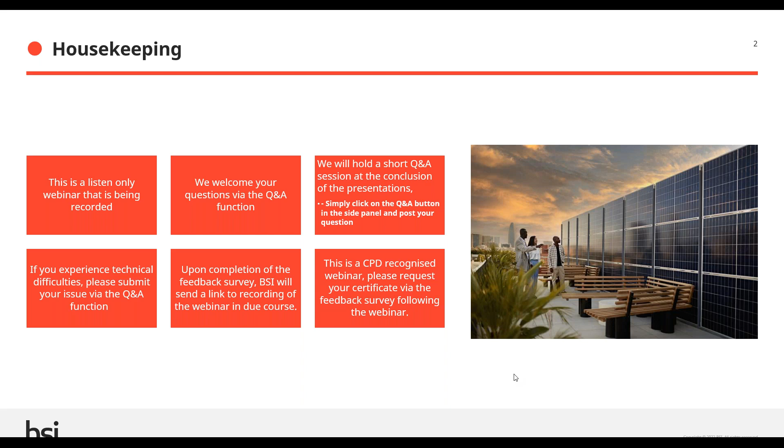Thank you, Claire. Good morning, everyone, and welcome to our 2023 Global Built Environment Conference. For those of us that haven't met before, my name is Ant Burd, and I'm Head of the Built Environment Sector here in BSI. It's my privilege this morning to welcome you all and to say a few words before we move into our conference sessions over the next 2 days.

So, where has 2023 gone, and what have we witnessed in the built environment sector? Well, here in the UK, we have seen a year marked by a significant slowdown in the economy. Construction analysts Glenigan, in their last quarterly assessment, suggested that UK construction continues to be battered by economic headwinds and sudden ad hoc policy change. Slight dig there, I suggest.

That said, more latterly, they have acknowledged that sharp falls in construction starts and a challenging set of economic circumstances in 2023, given the peaking of our interest rates, we can expect gradual improvement in market conditions over the next 2 years, and that's truly welcomed.

And yes, while new construction starts are generally down, we have started to see increased activity in both the new commercial sector and, of course, the repair and maintenance of our all-important existing stock. The fact remains we typically only replace our existing stock at the rate of about 1% per annum, meaning it is even more important to suitably maintain and, where possible, improve the performance of our existing buildings, but more of that later.

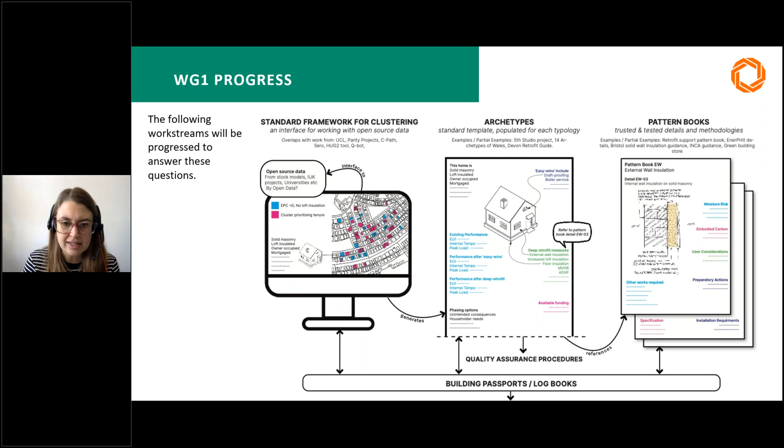And then more detailed design guidance and pattern books, and how they all feed together. These things all link to quality assurance and building passports, and now our thinking is starting to develop.

We're really understanding that the information we hold on a building, whether that's through a logbook, a passport, or another data centre, is key to understanding what measures are applicable, what design guidance you need, the larger structure of the data we hold on all the housing stock, and how you apply quality assurance methods.

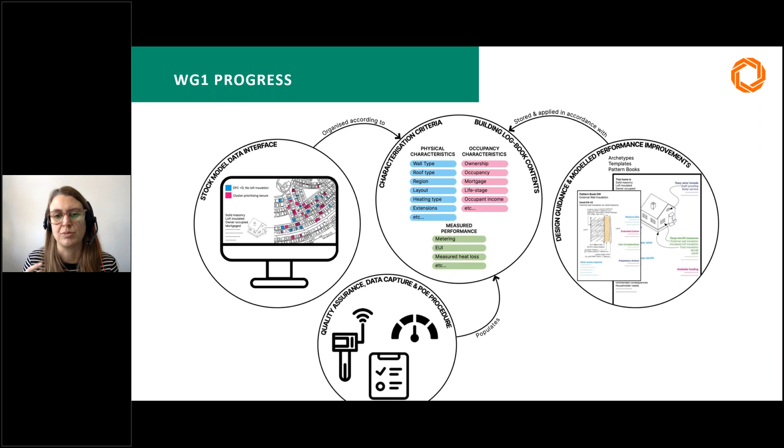So these are 4 different task and finish groups we're currently starting to run, where we're looking to provide frameworks and guidance that allow interoperability and standardization between some of these outputs that people in the industry are making. Working group 2 is on techniques and technologies.

We've held one meeting so far with this group with a variety of speakers. John and Diane talked about the supplier sustainability survey, and the attitudes that merchants, installers and suppliers have on supplying more sustainable products. We also had Stephen talking from Knauf's perspective about growing their supply chain.

That was really interesting because one of the key takeaways for me was that Knauf have really been able to grow their supply chain because of the regulation coming out on new homes, the Future Homes Standard, and they've been able to use that as a reason to grow. But what they're saying is there's nothing necessarily within the retrofit sphere giving them enough evidence to grow their supply chain. That's a key lever we can all start to think about and focus on.

Megan and Lee talked about the supply chain. They're both from Travis Perkins, identifying what the barriers and opportunities in the supply chain were. And then Ben from the SEA introduced their report, which I'd really recommend you all reading, A Technology Agnostic Approach to Heat in Buildings Policy.

This group's identified some potential outputs, so potentially a supply chain picture. How does the supply chain currently work? Where are the bottlenecks and inefficiencies? How can we allow that to work more smoothly to scale up retrofit?

Potentially a forecasting and future-proofing report. If we know what targets our homes need to meet, then what products do we need to get there? Can we start to map that and understand where we need growth? Tech adoption case studies, making it more apparent what technology is out there, and all of that's going to feed into our knowledge sharing.

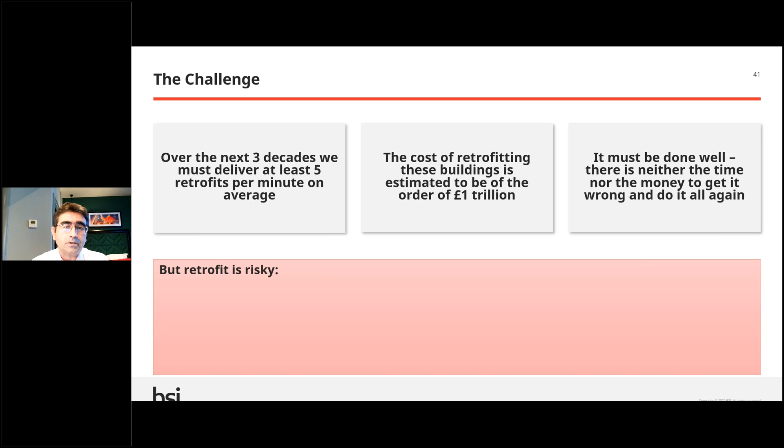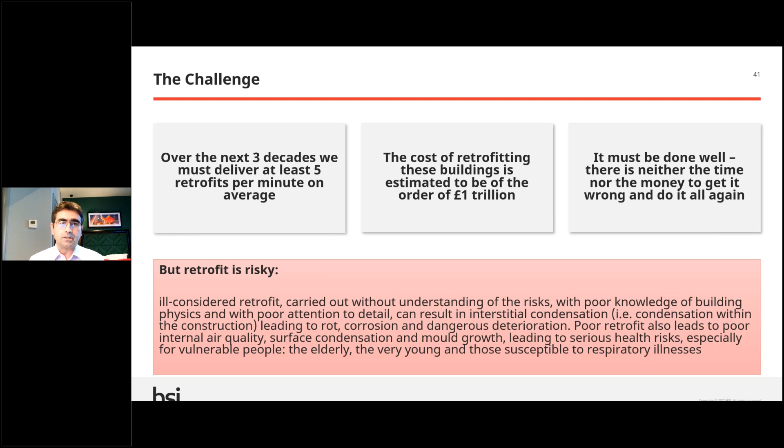The problem is that retrofit is risky, and we've seen this over many years. It's predominantly significant issues in design and installation, or misunderstanding of the buildings, ill consideration of that retrofit, the issues that we have from moisture, etc. And even though industry has made significant advances over many years, we still see constant impacts every day around us from failures within retrofit or misunderstandings within industry at times.

It was back in 2015 when the government launched their first review, the Bonfield Review, which led into the Each Home Counts report, that significant changes started to be made in our industry in this area. That report outlined 27 recommendations, of which there were 3 specific recommendations focused on standards and developing a framework of standards so that we could all work and deliver what was required for the occupants and for all of us at home and at work and anywhere else impacted by buildings.

The Retrofit Standards Task Group was set up to address the standards, and it started out by addressing research and looking at what there was - a similar piece of work that is being undertaken as we've just seen with the National Retrofit Hub, who are now taking on and furthering that information.

The framework itself that was developed following that initial review turned into what we now know today as PAS 2035, PAS 2030. And we have in place Trustmark, who look after this side of it and administrate to a certain degree. But as we can see here, they are there for the quality mark, supported by the Code of Conduct for retrofit installers and the Customer Charter. That is effectively that top level assurance for the occupant and the building owner.

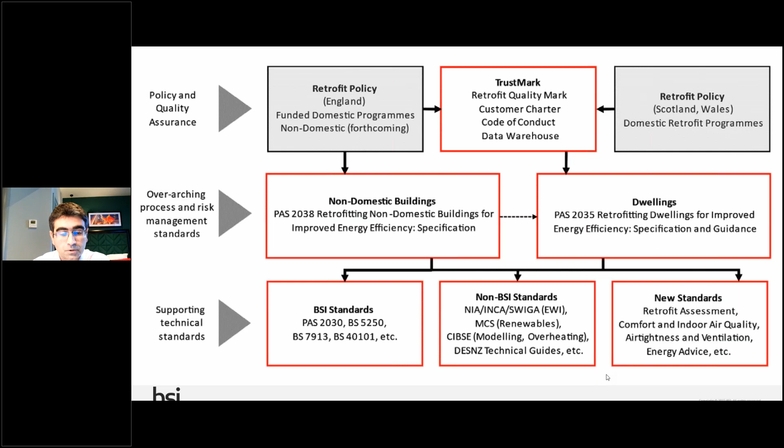The real understanding here is the requirement to minimize risks and provide robust processes for owners, occupiers, designers, and installers. It's because, as I already mentioned, most retrofit risks are moisture related and have time-consuming and expensive consequences if they're not well managed. The PAS standards are designed to help project teams manage those risks and protect the buildings and their occupants' health against the unintended consequences of poor retrofit.

The professionalization of retrofit is sort of a new type of work involving new materials, new products, new systems, new processes, and requiring potentially new skills. The capacity of the retrofit industry at the moment is inadequate and not necessarily well founded on proven techniques developed by the original pioneers that we had prior to the Each Home Counts review.

That's where these standards define good practice and bring that to all of us. It allows us to identify routes to zero carbon. Every building is unique—one solution for one building may not be the same solution for the building next door, even though they may look the same.

The retrofit standards require retrofit assessments, improvement option evaluations, medium-term improvement plans. Those PAS standards raise the client's expectations. They identify a stream of work for our industry, and they help us to discern and follow appropriate retrofit paths.

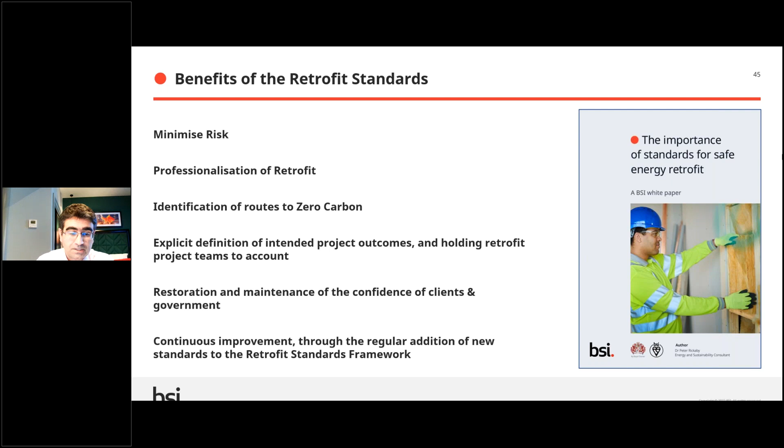And we will have, and we do have, this continuing improvement. Just this year, in fact just in September, we had the latest updates to PAS 2035 and PAS 2030. PAS 2030 is the installer standard that's referred to by PAS 2035.

This is where we currently are. As we now look forward to the key items for next year, there are three key areas. There is the allowance or ability to bring innovation quicker into the market so that we can meet our requirements. BSI have a strong innovation team and development on that side, working with UKRI Research and Innovation, Innovate UK, as to how we can get that innovation to move through the systems quicker. That is one of the key targets for this year.

There are further amendments coming. We have the regular amendments, and one of the key areas for a regular amendment this year is the scaling and the routes into PAS, making sure that we can open up the PAS and make it easier to get into and bring everyone on this journey for delivering what is needed.

But in order to do that, we also need to deliver the competency. The competency is crucial, as we've seen and heard from the opening discussion, and we'll hear more over the next couple of days from the building safety regulator and the health and safety executive. We're also working quite closely with IFATE, who are responsible for the apprenticeship standards, and also on the national occupational standards, which define the education for installers and others within the retrofit industry, so that we can get an alignment across England and the devolved nations to make sure we can all deliver what is required for the occupant and for ourselves and our families.

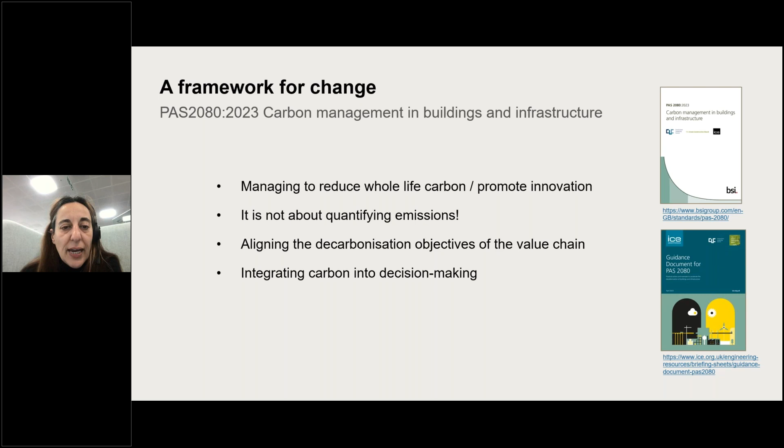The focus of PAS 2080 and the guidance document that you can see and freely download in the links on the right-hand side has been the decision making. So instead of being a technical, if you like, standard, it's about understanding how the different components of the PAS 2080 carbon management process essentially help us make the right decisions when it comes to decarbonization. Next slide, please.

We need to have a continual improvement process that everyone is following, being on data, on maturity, on low carbon innovations. But the essence is about how do we integrate all the different components of the carbon management process into all work stages, by challenging each other constantly when we're delivering a project, and having the right governance processes, systems, and collaboration behaviors, if you like, to achieve decarbonization.

As Claire mentioned, an organization can also achieve claims of conformity, can be verified according to PAS 2080, which is good, but this is not actually the essential bit. It's not about the tick box, yeah? It's about improving our maturity.

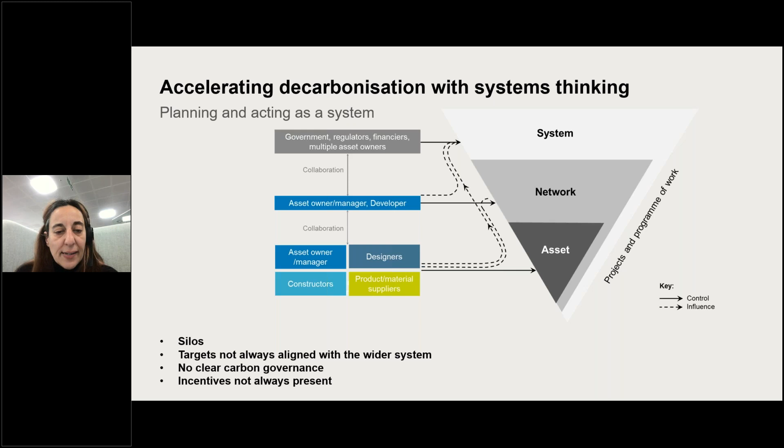It's quite a complex field to navigate, but we need to start from somewhere. So yeah, targets and decarbonization and focusing the right efforts at the right level, being asset, network, system, is key in the PAS. If we go to the next one, please.

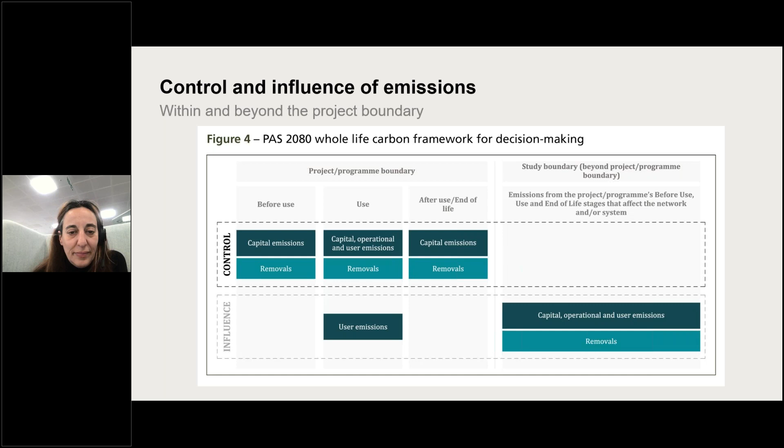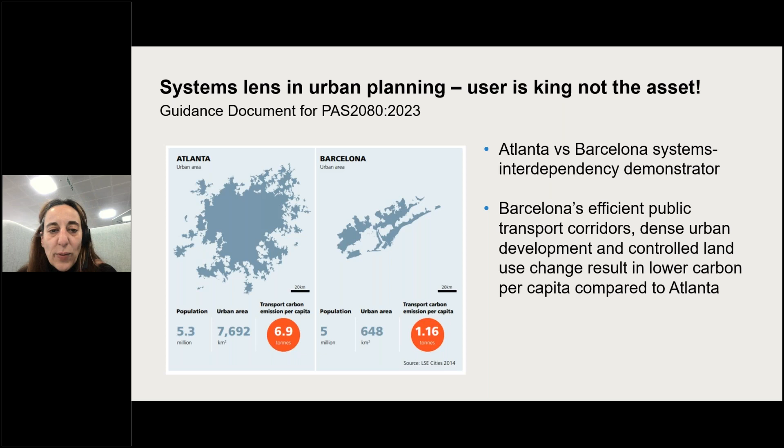Another way the PAS looks at systems, a bottom-up approach, is how individual assets can unlock wider system benefits for decarbonization, resilience, promoting biodiversity, and other benefits. This is when an asset need has been confirmed from different drivers, and the efforts to reduce whole life carbon at the asset level, while looking beyond the project boundary, can bring different benefits to the wider system.

The guidance document lists a few case studies of this type of systems example, like HS2 and the connectivity it brings to different regions and the wider benefits for decarbonization. There are examples from Anglian Water, where developing specific water resource management assets have unlocked different benefits in the wider system - on decarbonization, on sources of funding, on benefiting neighboring businesses with lower carbon operations such as greenhouses by exporting waste heat, and others. There are also transport examples. So the message here is that from a systems perspective, it's equally important to look at opportunities an asset can unlock in the wider system.

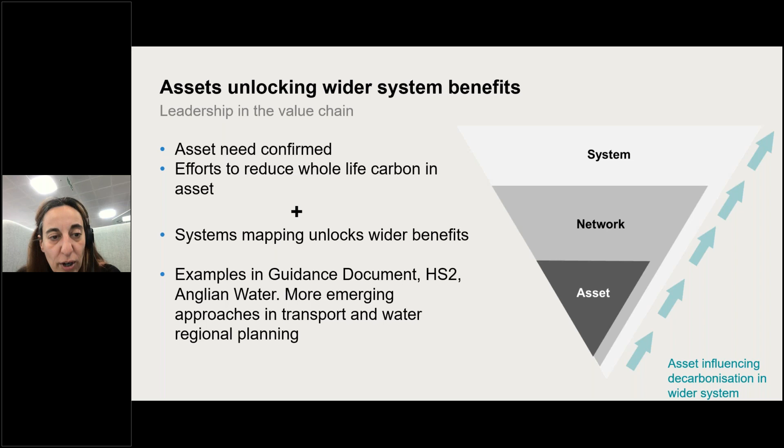It's important to look at our supply chains for these core materials that are essential in all infrastructure and buildings we're building. It gives case studies of how, as a supply chain, we can look at those emissions from a systems perspective and focus the efforts that are project agnostic, so we can create economies of scale and accelerate those products and materials faster.

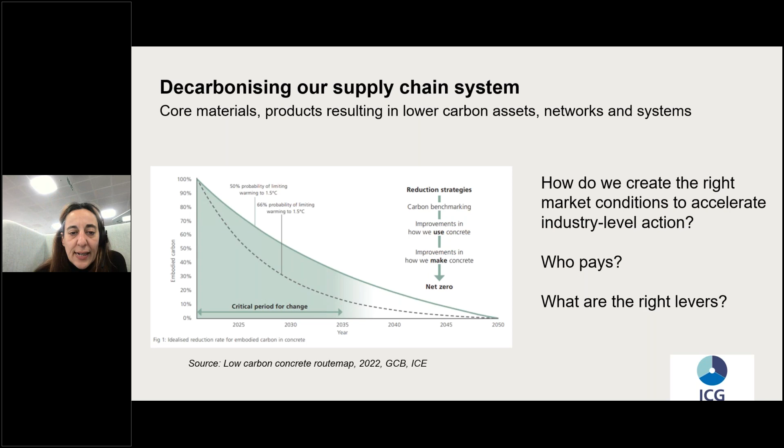But what we mean by collaboration, through all these examples, especially systems thinking, is that we really need meaningful collaboration from the beginning. This means having more innovative procurement models where we appoint people to share their ideas and reward them for that at the beginning, before we appoint a designer or contractor, to look at implications and opportunities at the wider system, whether geographical or supply chain.

The PAS encourages that. I'd like you to also look at the PAS City overarching worked example in the guidance document. That's a fictional development which is part of a wider system, showing the key roles and responsibilities for all the different value chain members in the diagram, what questions they should be asking, and what actions they should take from the beginning to maximize those systems benefits. It's a complicated subject, systems thinking.

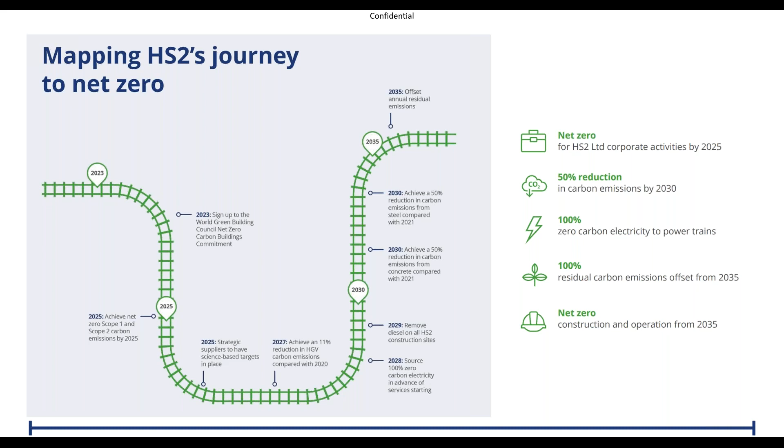If we continue speaking about engendering ownership and enhancing the creation of the right capability to identify and deliver carbon reductions, we are fully aware this is not a journey for the HS2 carbon team or HS2 alone. Instead, this vision needs to be shared among all members of the supply chain, as we've said in other presentations before. Only then will this become possible.

So internally, we run climate change and carbon training via the Carbon Literacy Recognized scheme. Thanks to this, colleagues increase their knowledge and make at least one commitment to reducing emissions in the workplace. Similarly, we disseminate our knowledge, intentions, and ambitions externally.

We work very closely with our supply chain team to make sure that our supply chain partners and industry peers understand our HS2 carbon commitments and requirements. For example, carbon is included among the frequently asked questions of the HS2 supply chain webpage. What you can see here is an image from the supply chain carbon information pack that is externally available, released after a half-day workshop on carbon reduction delivered in July this year. Behavioral change, collaboration, and leadership are fundamental on the net zero journey.

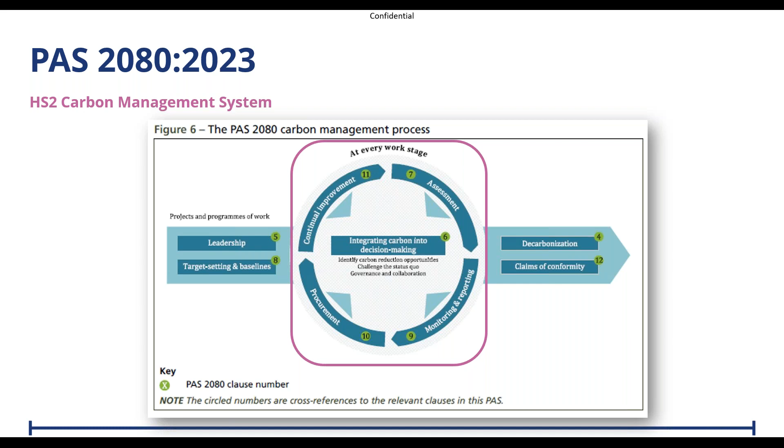So if we go to the next slide, then we are going to cover the last part of the flowchart that speaks about decarbonization, and I'm going to do this through these two case studies. So what are we doing to reduce our carbon emissions?

In the joint venture delivering the Colne Valley Viaduct, they are on track to cut the amount of embodied carbon by 28%, which equates to 63,000 tons of carbon dioxide equivalent emissions. They have achieved this by working closely with our rail systems to narrow the structure by over a meter, which has enabled a significant reduction in the amount of concrete and steel needed and associated carbon emissions. They've also significantly reduced the amount of earthworks required for the approach embankment for this structure.

The other example, the Thames Valley Viaduct, being delivered by EKFB, is a great example of how our contractors are using the latest engineering techniques to reduce carbon emissions from construction. The design team has simplified the structure of the viaduct so that every major element can be made off-site before being assembled on-site, slotted together like a giant Lego set. This is estimated to cut the footprint by 33%.

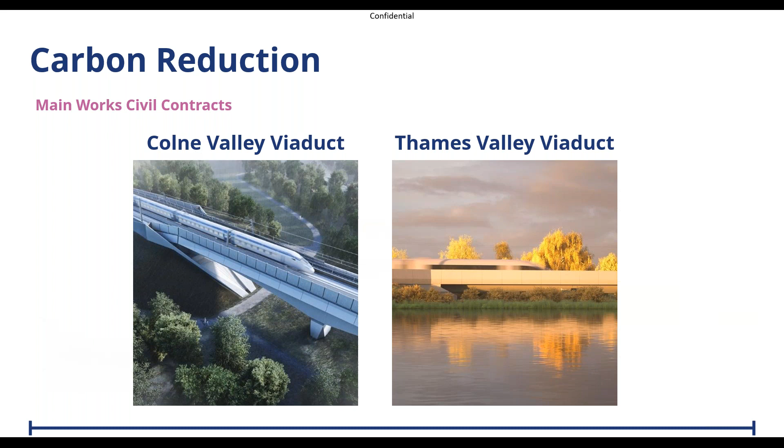Next slide, please, and we'll touch on the last example that I want to speak about today. This is about the fabulous progress against our HS2 diesel-free target. We celebrated our first diesel-free site in May 22. This was Canterbury Road Vent Shaft from SCS.

Then, in parallel with the external collaboration we offer to the Construction Leadership Council, we released our diesel-free plan in November 22. Our diesel-free strategy outlines the following principles: to improve efficiency, to use clean electricity, to use cleaner fuels, and to work together to collaborate.

According to the maturity of the different sites on their diesel-free journey, the sites are classified in diamond, silver, gold, or bronze. Currently, we have 19 diesel-free sites, and the target is to achieve all sites to be diesel-free by 2029. So how is this being achieved?

This is being achieved with a combination of changing to mains power on 100% renewable energy tariff where possible, and implementing innovations, including retrofit technologies, biofuels, hydrogen, and solar.

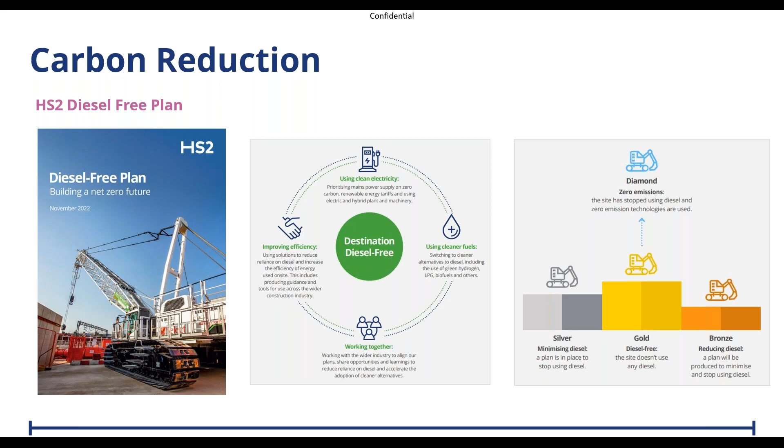Thank you, Beatrice, and thank you very much, Maria, as well. If you would like to switch your camera on, Maria - no, Beatrice, you've got a few technical difficulties. So a couple of quick questions.

I think it was great to hear the focus on the systems thinking aspect of the standard and really the complexity of it. But Maria, what would you say are the key challenges to the systems thinking approach to decarbonisation?

Claire, there are many challenges. Yeah, basically, how long have you got for a response?

But I would say as a starting point, it's very important to try and understand how our project, being at the asset level, the network level, whatever that may be, how does it fit if we have any targets, how does it fit with the bigger picture when it comes to net zero targets or any decarbonization targets? This is a fundamental question, because so far we're seeing asset owners or developers setting their own asset net zero targets, or 30% reduction, 40% reduction in whatever emissions being capital operational, whatever that may be.

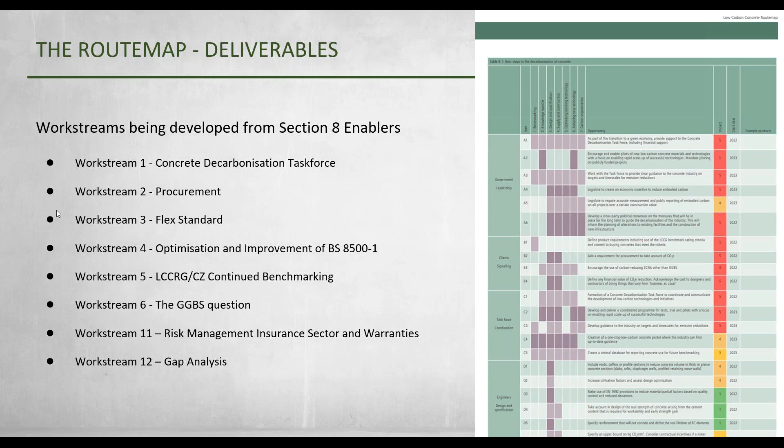Work stream 2, procurement. This work stream is due to kick off early 2024 to enable the gathering of different strategies that are out there for businesses and projects in order to procure lower carbon technologies.

From this, we should be able to understand what type of concrete elements can be constructed with different types of cement and different concrete types, different strength classes, which will provide the overall project solutions in order to meet various targets, whether they be business targets, project targets, or indeed government targets.

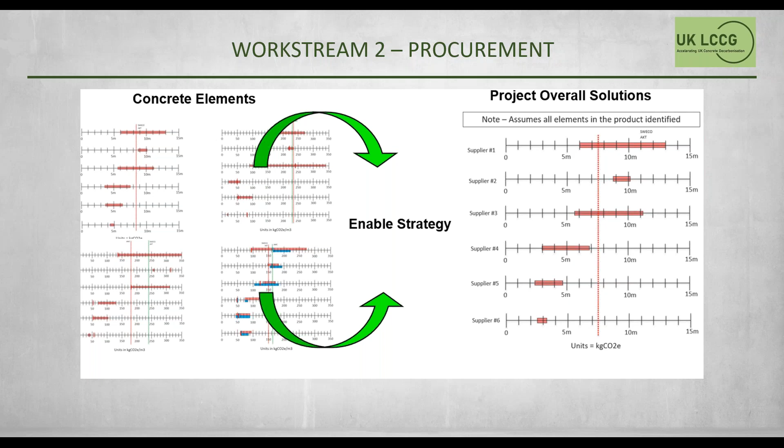Something we're keen to understand from procurement is what is available within each region. It's fair to say that within the M25 and London in particular there's a wealth of options available to various projects in order to procure lower carbon technologies. That may not necessarily be the same as you go outside of the M25, particularly in rural areas. So we need to collect data for procurement specialists to look at lower carbon technologies, to understand how to focus efforts and even funding in other areas, to provide an equal and level playing field for projects and businesses in terms of procuring lower carbon technologies.

So workstream 3, the Flex 350. James is going to discuss this in more detail. But one of the things the LCCG did at the beginning was carry out a survey to try and understand what everybody thought were the barriers towards the adoption of lower carbon technologies.

One of those perceived barriers was standards, and standards did not necessarily support the use of alternative binder systems. So we went to the industry and asked them to contribute funding in order to develop a new Flex 350. The industry reacted very positively. We were funded to the maximum we needed and a bit more, and we started the Flex 350 work.

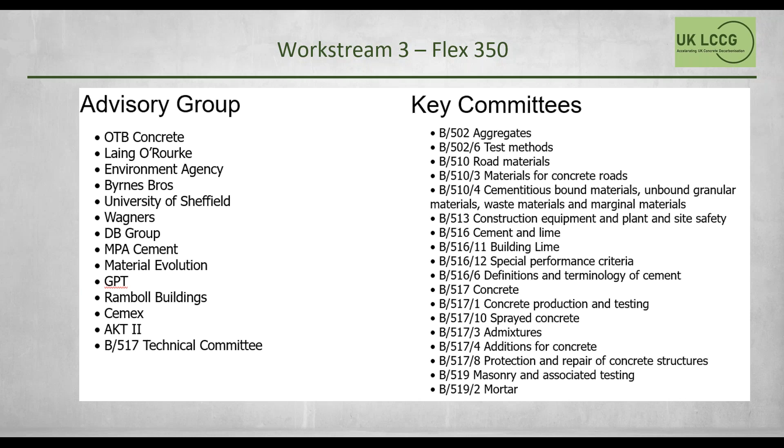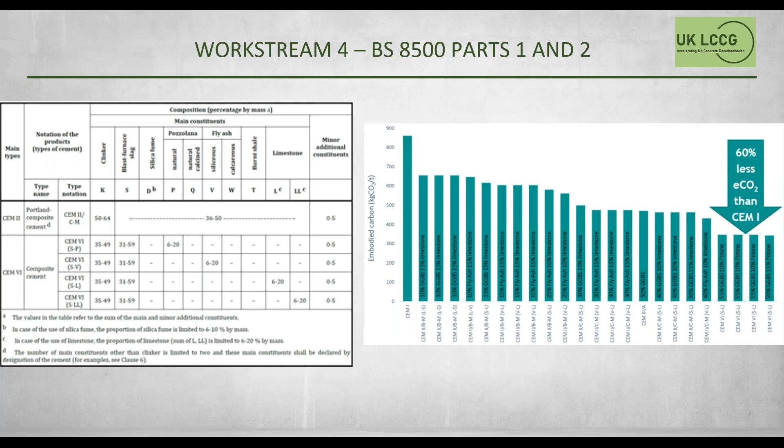So workstream 4, BS 8500 Parts 1 and 2, as Claire has very briefly touched on, that work has been completed, and the revised 8500 will be out fairly soon. It now includes lower carbon cements, albeit with Portland cement as the main activator, but it's the new cement type, CEM VI, which offers the customer a lower carbon cement type to be used in general applications.

The hope is that these CEM VI cements will become just as popular as the traditional cement blends, but the consequence of CEM VI is it will reduce the reliance on GGBS to reduce the carbon intensity of a cubic meter of concrete. It will reduce the Portland cement content and offer a reduction in the share of traditional cement blends.

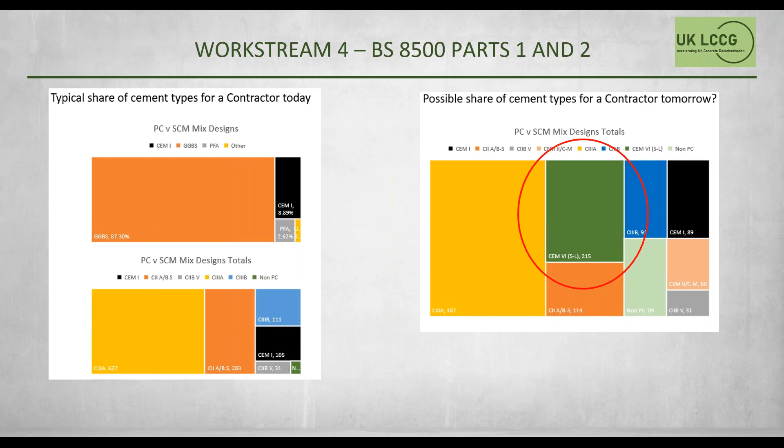Workstream 5, continuous benchmarking. So the question is, what constitutes a low or lower carbon concrete? We need to understand the carbon intensity of our concrete. So the LCCG developed a benchmark, collecting a lot of data from the industry and setting carbon benchmarks in bandings across different strength classes.

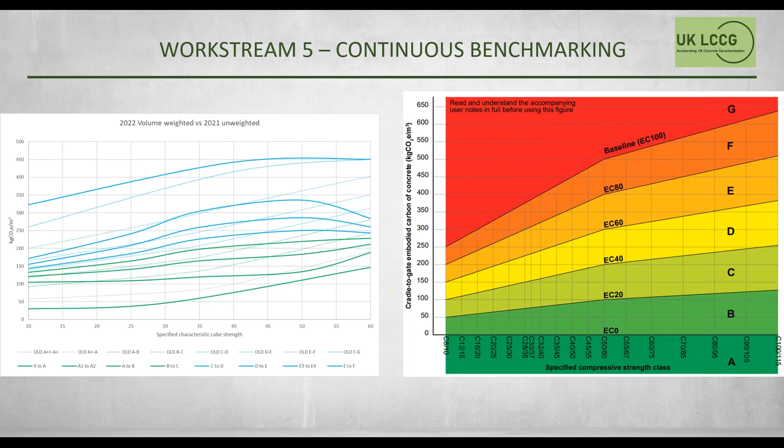The graph on the right-hand side is the benchmark developed by Arup as a consequence of the LCCG work. This benchmark is more aimed at policies for businesses and governments to set, and provides a similar type of banding. The Arup benchmark is static, so that will remain as is, whereas the benchmark on the left-hand side, the LCCG benchmark, is dynamic.

Each year, the plan is to collect more data from the industry. That data will be assessed, and the benchmark year on year will be re-evaluated and reset, which will lead to a reset of project ambitions.

And hopefully, we should see a decline in carbon intensity in line with the benchmark. In order to do that, we're developing a method to collect carbon data, concrete consumption, strength class, including a QA module which will help us determine what the carbon intensity is against actual strength gained on site. All that data should lead into future revisions of BS8500 with the hope of reducing the minimum cement contents.

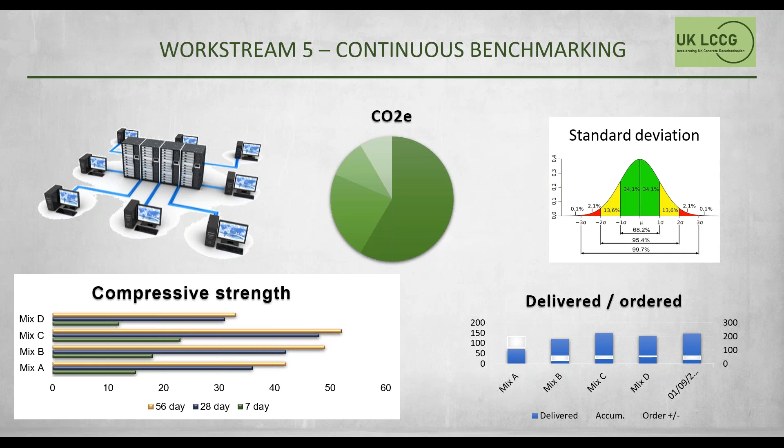That data will be collected by way of the CMAR tool, the Carbon Measurement Assessment and Reporting tool. We feel that the best source of information is not necessarily from the concrete producers, but actually from those who are purchasing concrete, your contractors on site, because they know exactly what strength class they require and where the concrete is going, which elements. We can determine how much concrete is being wasted due to what's being ordered, what's been designed, what's being placed. The contractors looking after the QA of the concrete helps us determine the cement content in relation to the actual strength gained. So that data feeds back into the benchmark, feeds back into the technical committees, and then hopefully we can reduce minimum cement content for modern concrete or modern cement technology.

The CMAR tool allows all the contractors and the projects to report internally or externally on how well and accurately the project is achieving any targets set against it.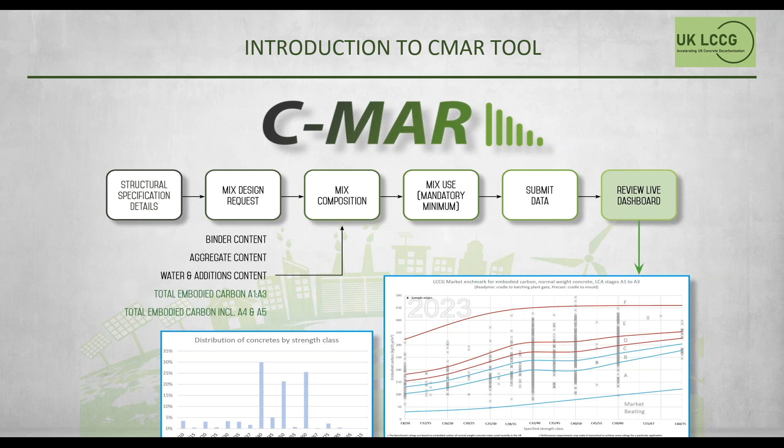It's key to understand the different types of concrete elements we are constructing, because some have a requirement due to the mechanical performance of that concrete element or the exposure conditions, and they all have a bearing on the types of cements and blends that can be used. That's related to the strength of the concrete. So we need a deep dive into the data - what type of concrete elements are being used and what types of cements and concretes are being used to build them, and what is the intensity of each of those concrete elements.

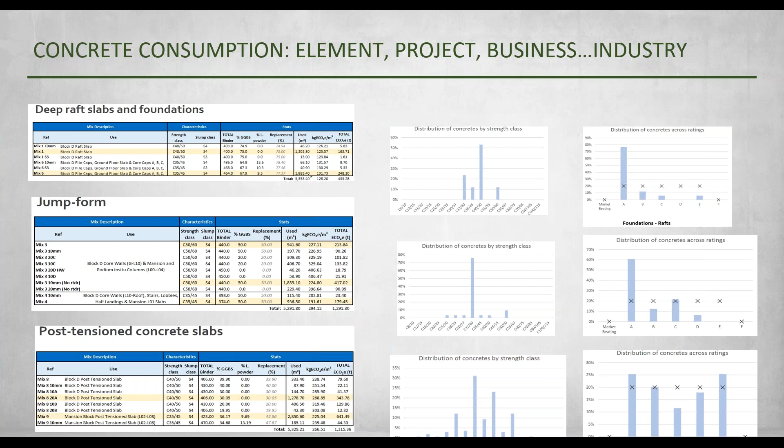That helps designers assess that information and look at future projects, learn from previous projects, and with a degree of confidence reduce the carbon associated with concrete works for the next project. So we're always learning, and we're able to measure, assess and report, reset the ambition, and then go again.

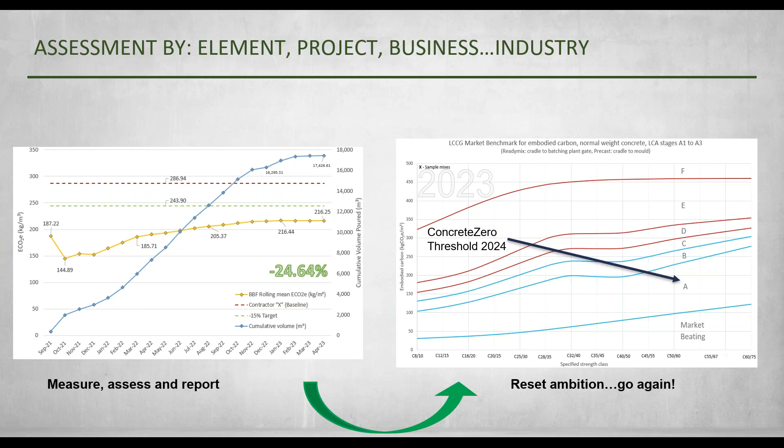So workstream 6, the GGBS question. Many people think that GGBS is a constrained material and we're using too much of it, or using it for the wrong reasons. Other people think completely the opposite. So the LCCG and climate group Concrete Zero set about investigating the efficient use of GGBS in reducing global emissions. The paper is about 12 pages long, has a lot of data inside, but one thing about the GGBS question is it does split opinion, probably depending on what role you have in the industry and certainly what region you are working in. So even though the paper has been published, it will certainly need a revision as information changes and we become much more knowledgeable about other regions and the availability of GGBS.

One recommendation from the paper, though, is the urgent need for funding into other technologies.

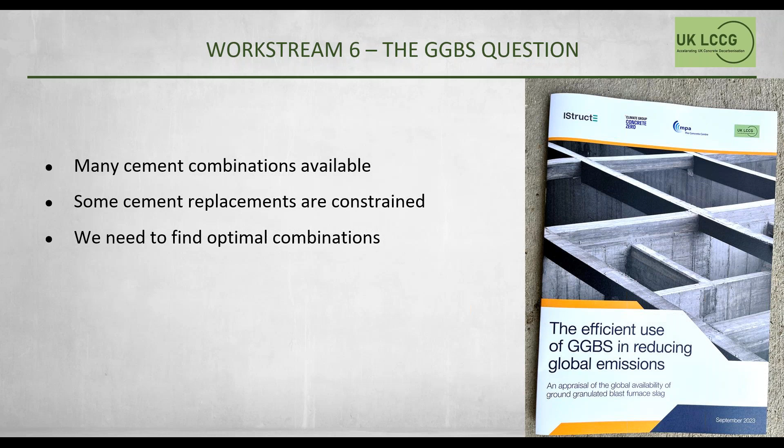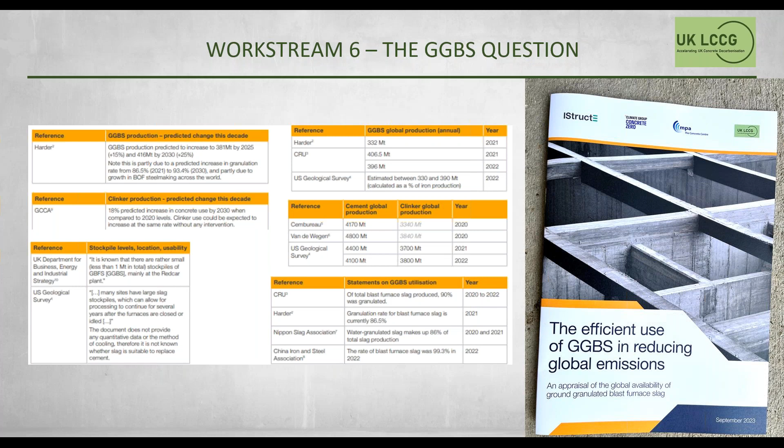Workstream 11, risk management. This workstream started about 2 months ago. One of the other barriers identified very early on in the life of the LCCG was the perception that the insurance sector was stunting the opportunity to adopt lower carbon technologies based on unknown risks. That perception was fueled by probably a lack of historical evidence of use of lower carbon technologies, and certainly fueled by a lack of understanding how to navigate existing codes and standards such as Eurocode. It's certainly the case that the existing suite of codes and standards do provide a route for a structural engineer to assess the suitability and fit for purpose of a non-code compliant cement type.

But it comes down to knowledge and experience and confidence in being able to navigate through these standards and assess the technical information presented to support the specification of a cement type that may not necessarily sit in existing codes or standards such as EN 197-1. So we've begun the work. We're talking with the insurance sector, and the good news is that the insurance sector has come to the party. It is taking an active role in developing this workstream.

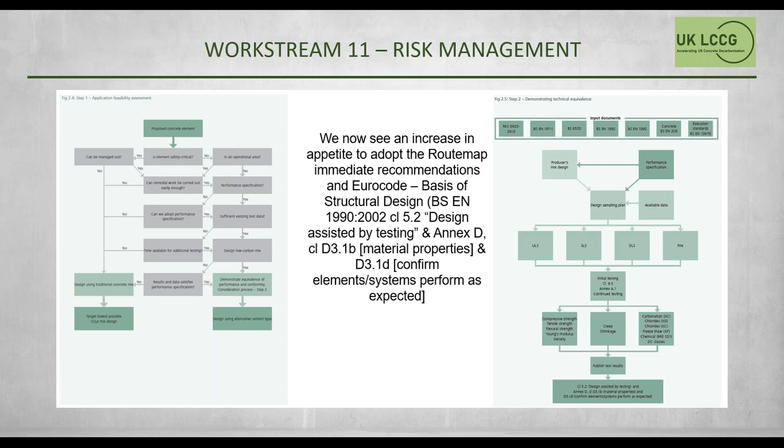We have a live event in May next year, geared towards a global reach. The insurance sector has recognised that this is seen as a real and genuine barrier, and it's started to move to remove that perception of itself. So the insurance sector is working alongside the construction industry to develop authoritative guidance documents, and it may well result in establishing a technical committee to help the insurance sector understand the intricacies and complexities of cement chemistry and concrete technology.

So those are the live work streams we have going at the moment. We believe we are making a positive influence on the industry. We are affecting change, but there's still a lot more work to do.

And if anybody wishes to be part of the LCCG, all you have to do is contact BSI, or contact me direct, and we welcome your contributions to the LCCG. Thank you very much.